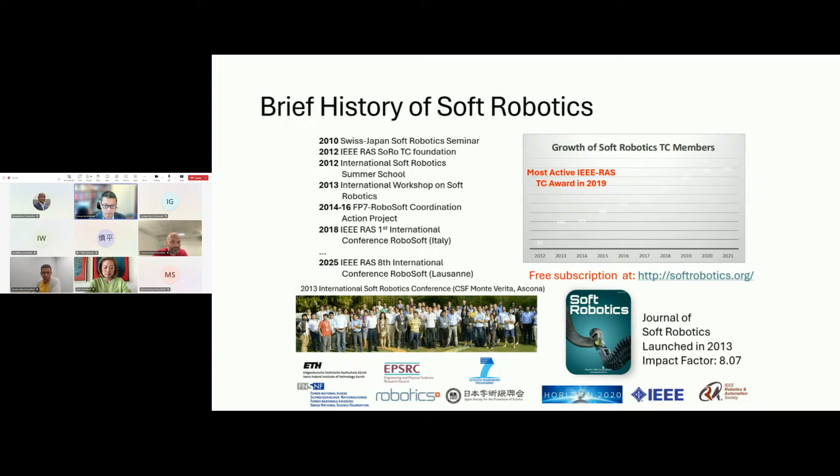If you go to the next slide, you see a lot of events we organized in the past. We started in 2012 with a summer school, 2013 we had a conference, and then many associated events of soft robotics over the years. We even have an online version of this event, the Embodied Intelligence Conference, in the last 5 years.

And the growth of this community is because of the very interesting concept of soft robotics attracting interesting researchers together for the very important discussions about the future of this field of robotics.

If you go to the next slide, you can see from my point of view the soft robotics revolution is happening in the last 10 or 15 years, mainly because of three main driving forces: robotics became cheaper, easier, and faster, and soft robotics only accelerates this direction of robotics research. So even without any skilled knowledge about mechanical design or fabrication techniques, you can actually build robots very easily and quickly. This was the main driving force of robotics.

And I'm telling my Cambridge students that if you're doing soft robotics, you're doing the right thing, because this is a very important research field and many people are joining. But also, if you're not doing soft robotics yet, this is a field you can easily catch up in as a beginner. That's why I'm telling my students that everyone should basically be doing soft robotics.

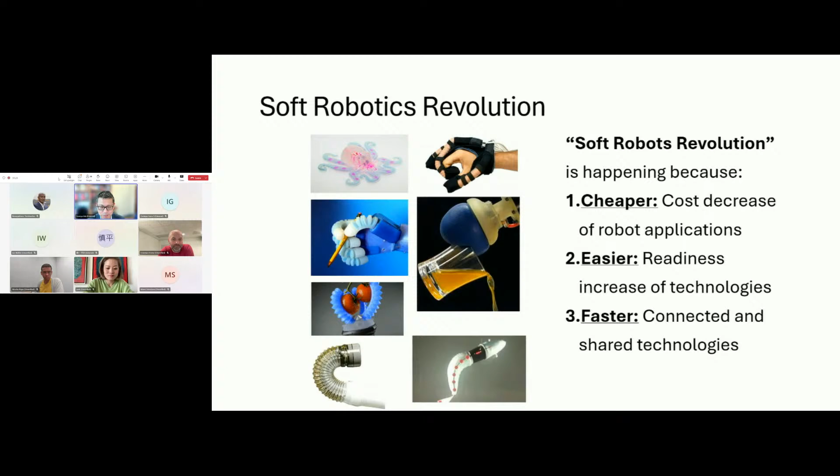Please go to the next slide that shows why soft robotics is an important field. This gives all different directions in robotics, from sensors to locomotion in air, on land, and on water. There are many important robotics applications, such as medical applications, locomotion applications, wearable applications, and industry applications. So this is not only about applications, but also fundamental research, such as simulation, modeling, control, and mechanical design and fabrication techniques. Those are the research fields currently expanding into this field of robotics.

What I wanted to highlight here is that this is just the beginning of this field. I think soft robotics is going farther and farther, and I hope this handbook of soft robotics can show you the depth and breadth of this field and contribute to this community in the future, helping the field grow bigger and more productive.

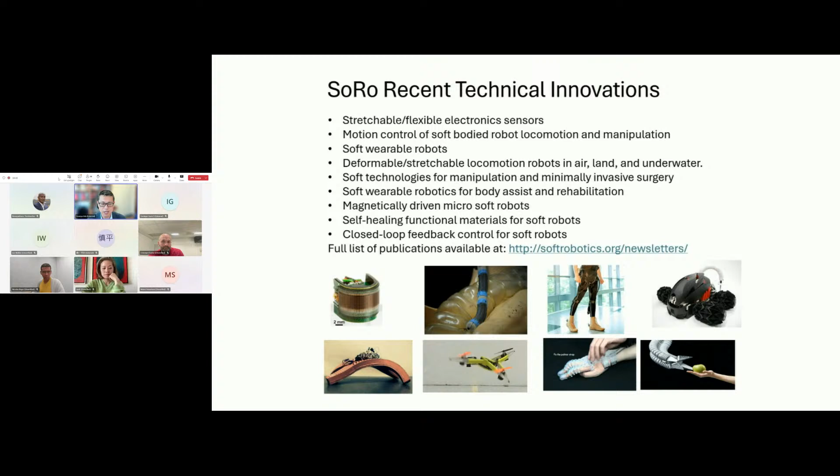Okay, and with this, I'd like to conclude my presentation, and I'd like to congratulate you all again for the big milestone achieved for the soft robotics community. I hope you can enjoy this launching event in London. Thank you very much.

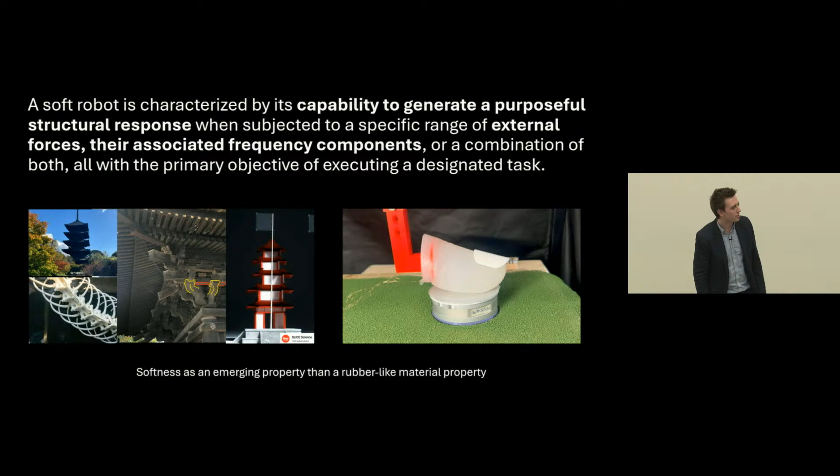Thank you for coming. It's been an exciting journey. It took us about 2 years to do this, so finally we are here.

So in this book, there have been different notions of softness, soft robotics in the field. It was largely limited to rubber-like material, and that is soft, right? But we wanted to be more general, go beyond that, and have a broader definition or explanation for softness. So softness is an emerging property for us, as far as this book is concerned.

For example, on the left you can see this Toji temple. This has survived 400 years of Japanese earthquakes, and it's a rigid structure. But when there's an earthquake, it can behave like a soft snake, exhibiting autonomous, intelligent behavior given some forces and their frequencies. So it is designed to be intelligent given the forces of an earthquake. It is rigid, but it can exhibit softness given the forces.

So our definition of softness in this book is relative to the forces and their frequencies. That also applies to rubber, right? At human-level forces and frequencies, rubber is soft. But it is more general in this sense.

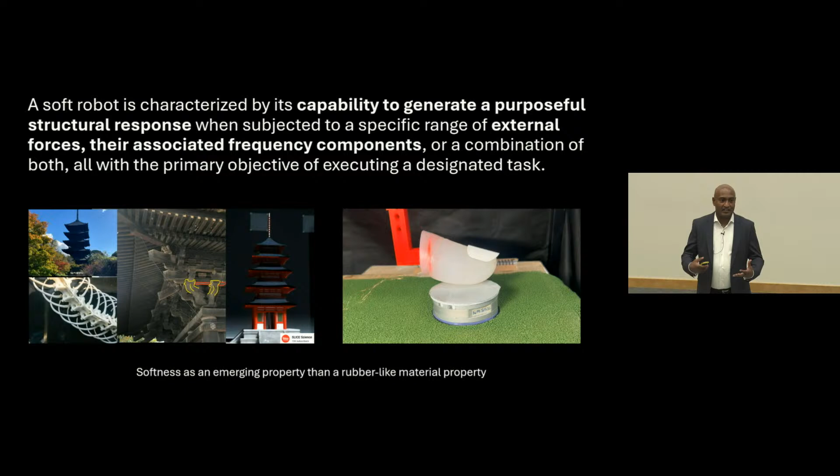And then this robotic finger, developed by a PhD student, Parvati Sunilkumar. For this finger to feel forces, it needs a nail, it needs a bone. So there can be hard structures within so-called soft structures, and they are needed to give this emergence of embodied intelligence. It cannot be homogeneous, it cannot be radically soft. It can be soft and hard, it can be hybrid. So that's how we are relaxing this definition of soft robotics.

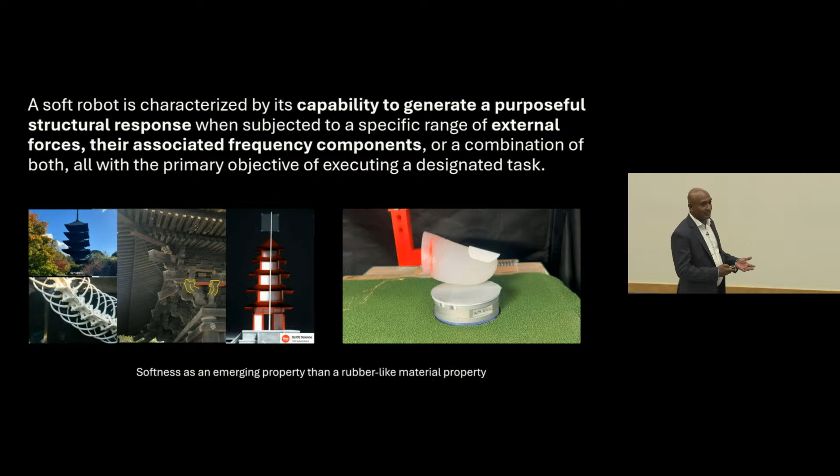So central to the argument about embodied intelligence is this idea of ghost circuits. That's another term we're introducing in this book. A ghost circuit is a circuit that doesn't really exist, but it emerges when conditions are right.

For example, this is a dead fish, and George Lauder's lab at Harvard demonstrated that if there's a turbulent water stream against an obstacle, it can start to swim like a live fish.

What that means is the body shape and its stiffness distribution along the body has evolved to harness energy from the turbulent water, the vortexes, and come into a harmonious circuit. So part of the dynamic circuit required to generate propulsion forces is in the water, actually, and the other part is in the body.

When they come together, they complete a circuit, a dynamic mechanical circuit, and the function of that circuit is intelligent—it emerges as intelligent behavior. We call it a ghost circuit because you cannot pick up the fish and see it.

You cannot see it in the water. They come together and exhibit that behavior. When the fish swims in the stream from point to point, the turbulence level keeps changing, and in the live fish, what it can be doing is regulate its stiffness to stay linked to the circuit that is ever changing.

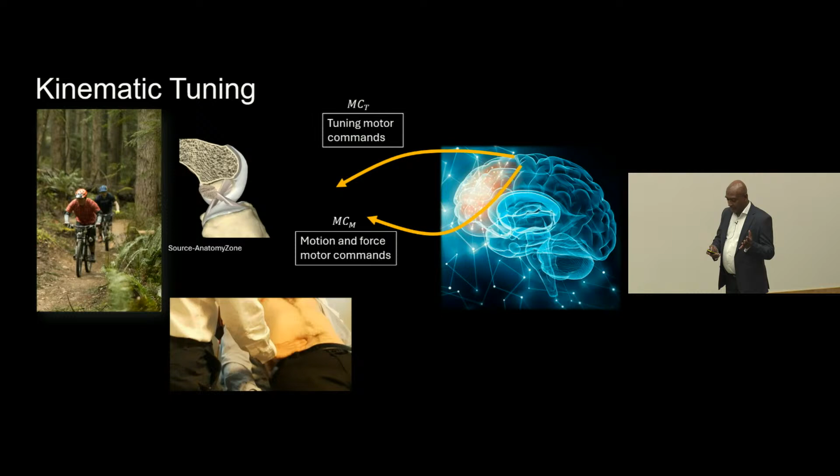Why do they do that? When they want to feel something, right? So the feeling is not also a given thing. You have to be coupled as a ghost circuit. In this ghost circuit, the physician has to be dynamically coupled with the patient in a seamless manner for it to understand what the body random variables are. So it is not a given thing. You cannot just press and feel things. You have to do kinematic tuning to feel things, right? So it is perception and stability both. Kinematic tuning is important, and then that establishes these ghost circuits and maintains these ghost circuits.

The other important thing we introduce in this book is behavioral lensing. Behavioral lensing is about taking MCM type commands in addition to MCT tuning commands, actively moving around in various different ways to feel better. So they would do percussion, bimanual examination, unimanual examination.

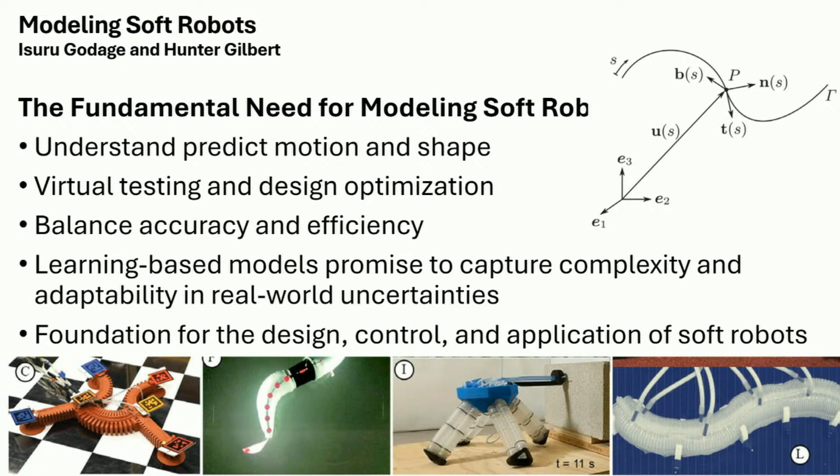And thank you very much, Thrish, for your really insightful comments and discussion. So now we're going to hear from Professor Isuru Godage at Texas A&M. Professor, are you there? Yes, David, can you hear me? Yes, we can. Great, and we can see your slides too. So over to you. All right, thank you.

First of all, thank you to our editor, Dr. Nanayakkara, for leading this effort for two years and assembling a great set of researchers to put together this Handbook of Soft Robotics, and it culminated in a very comprehensive overview of soft robotics that anybody can pick up and use in any part of their research. And it's great to see those in shelves.

And now myself and Dr. Gilbert at LSU, Louisiana State University, was tasked to write the modeling chapter for this book. Now, as many of the researchers, Dr. Ida and Nanayakkara brought it up, soft robots—it's a relative term, but they generate locomotion by deformation. Now, for understanding this deformation, we need models.

The other reason for the necessity of models is that soft robots have a low threshold for deformation, given that it's high compliance, and they are very susceptible to deform passively when they are in contact and applied some forces like touch.

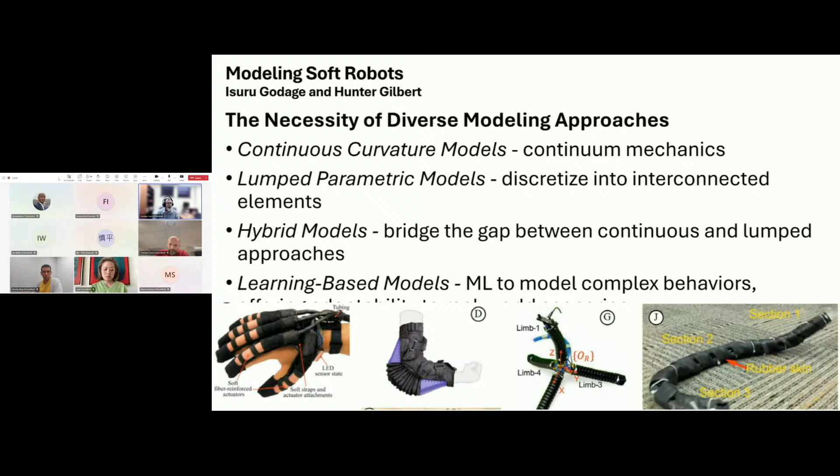Now, next slide please. So we ended the chapter by giving the reader some roadmap on how to select the good model. Now, then again, this is actually kind of an art and a science, depending on how much experience you have.

It used to be that it's trial and error, or you inherited some model from somebody who worked on the problem previously, and then you just live with it. Now what we try to do is try to come up with some set of parameters, and then you kind of identify which one you need from this model.

For example, how accurate should it be? Or if you want to do a design of a robot, then of course you need that to be faster, so you can use machine learning and iterative processes. So the guidelines we came up with are: first you need to understand the robot, like what type of deformation does it have, how complex that is, how do they achieve the deformation, and how fast they are.

And then obviously you need to look at the material properties. Are they stiffer or soft? Because if they are soft, then you need to account for all the environmental deformation aspects and whatnot, and what type of accuracy and precision you need, efficiency.

And if you have a robot already, then there's a chance that you can get a lot of data which could be used to come up with some machine learning models. And of course, finally, the needs for control, because if you try to do real-time control, then we'd like to have a real-time, that means a faster model.

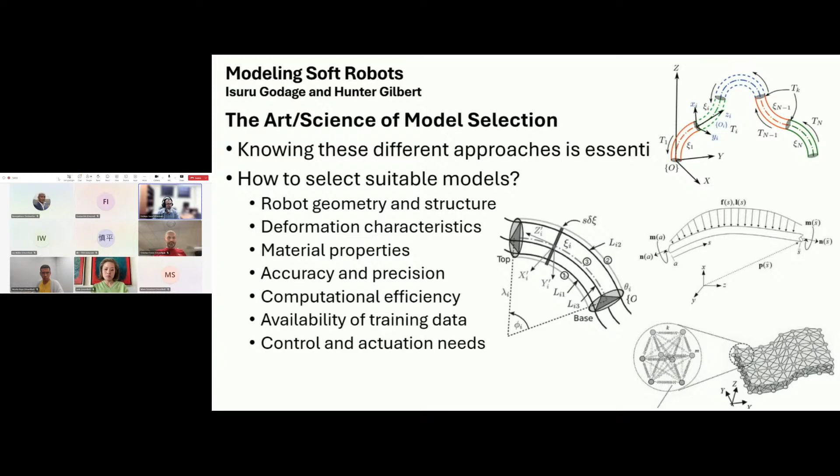Thank you very much, Professor Godage. Really interesting. So now we're going to move to Professor Ian Walker at Clemson University.

Hello, can you hear us? Can you hear me? Great, yes.

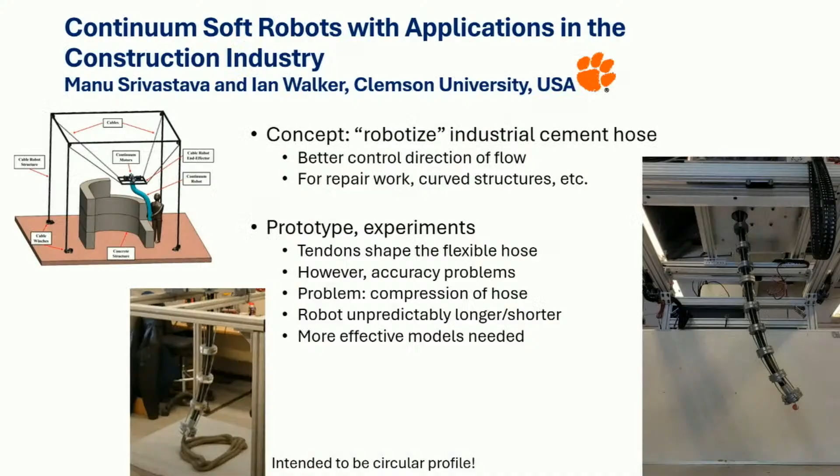Okay, great, thanks. So I'm now with the University of Wyoming, but this work was done at Clemson University. My co-author Manu and I are honored to be part of this group. It's a very distinguished group with lots of really interesting ideas.

Our chapter starts to address the idea of some of the challenges when you want to take soft robots and apply them to particular applications, in terms of the problems you encounter trying to solve particular application-related problems, and then some of the modeling issues that Isuru just spoke about.

Our particular application is in the construction industry, where our goal for the project was to improve the delivery of cement, to be able to give higher fidelity structures, to essentially 3D print cement in a robotic sense.

Our basic idea, shown top left, was to take the industrial cement hose and robotize it. In contrast to a number of things we're going to see today and that are talked about in the book, rather than building a robot from scratch, we inherited the state-of-the-art industrial cement hose, and you can see one moving in the video here. The goal was to make this move essentially like a snake.

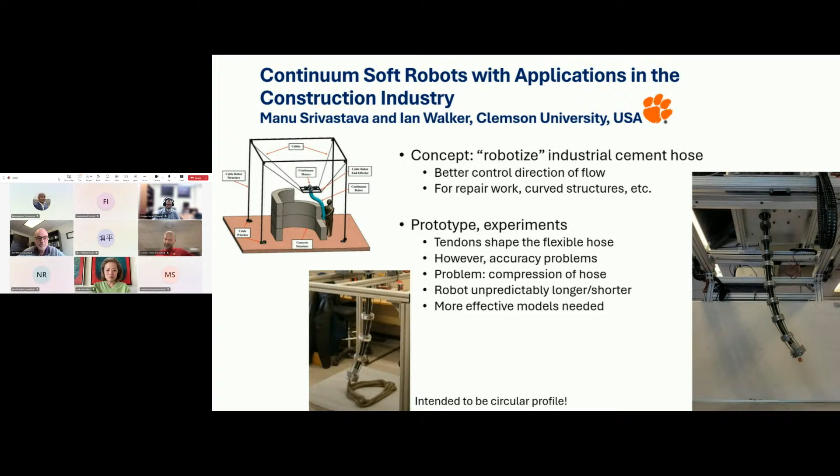The basic problem was that the models we were using were based only on geometry, and they weren't taking into account the tensions and forces being applied to the system. So what we describe in the chapter goes back to modeling: we developed a way of compensating for the axial compression by looking at the statics models and the mechanics of the situation, understanding a bit more about what's going on.

We were then able to come up with some models, in particular models that did not require us to know the tensions in the cables, because that's something that would have been practically more of a problem to adjust.

So basically, we came up with a new elasticity compensation model that let us figure out how much we should pull in the tendons and compensate for the compression that was happening.

Intuitively, the way I like to think about it, probably because I don't ride horses, is that if you imagine riding a horse with reins, you can loosen or tighten them. There's a point at which if you give the horse too much rein, it can do more or less what it wants, and if you pull in a certain amount, you can really restrain the horse. There's a magic spot in there that corresponds to preload in tendon-based devices.

So basically what the model displays, and the details are given in the paper, is how much to pull in on the tendons so that you have just enough preload, just enough tension, so that your robot, as you move it around, does not change its length.

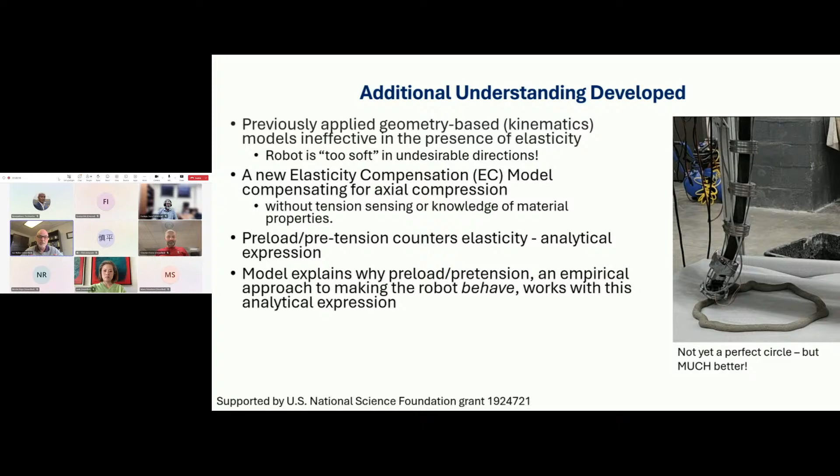I hope that anybody interested, if they read the chapter, will get a sense of some of the issues you have to go through when you're trying to apply a soft robot to a particular practical situation. And there I'll stop, and again, thank everyone for joining.

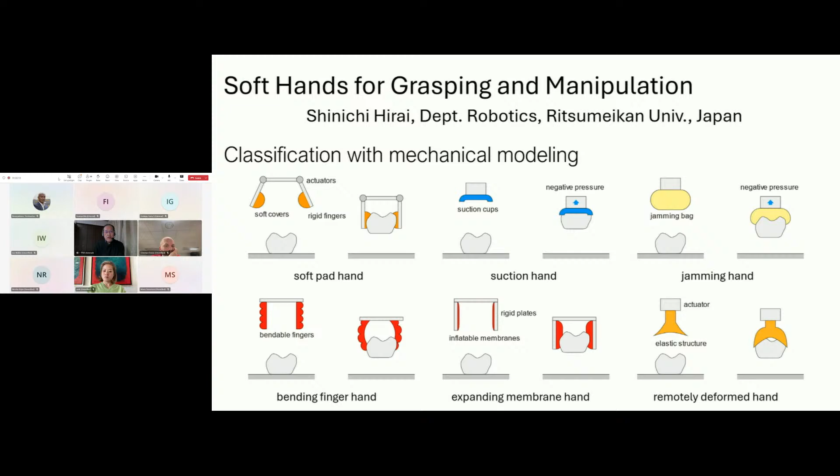Okay, the next slide please. One good application of soft robotic hands would be food manipulation.

I've introduced several soft robotic hands designed for food manipulation, as shown here. I've also introduced soft sensors applied to soft robotic hands, including resistive, capacitive, and magnetic sensors. I then introduced entropy reduction in soft tactile sensing and material design for force sensing.

This means that such soft material can perform information processing, and also if we design the material properties, we can improve such information processing capability.

That's it. I hope you find this chapter interesting. Thank you very much.

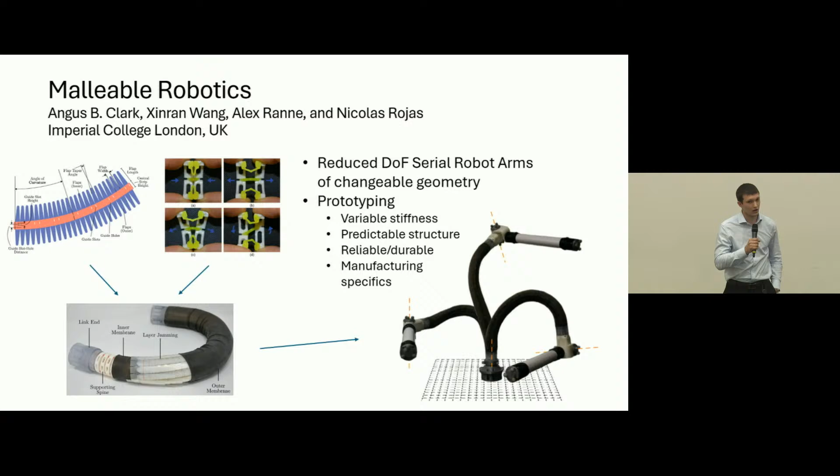We don't just stop there. The next stage is you now have a robot arm, but it changes, and this makes it really difficult to model and actually control this robot arm. The traditional ways of doing this, DH parameters or screw theory, don't really work without integrating lots of complex sensors. So one of the things we also propose in this chapter is a new method.

One thing I want to highlight from this image in the bottom right is a 2 degree of freedom robot arm. It's incredibly simple, and yet some of the workspaces you're seeing here would normally be achieved by a significantly more complex robot, a 3 or 4 degree of freedom robot arm.

Anyone familiar with robotics will know that one of the most expensive components, in fact the most expensive component in a robot, is its joints. By cutting those down, you save in cost.

The final part of this chapter explores how we actually interact with these robots. If you've got a structure that is changeable, you need to be able to predict what those changes are actually doing. One thing we explore is the use of holograms and human-robot interaction, which allows us to see in real time the changes you're making and how those affect the capability of the robot. I hope this chapter will be a very valuable resource for anyone reading it.

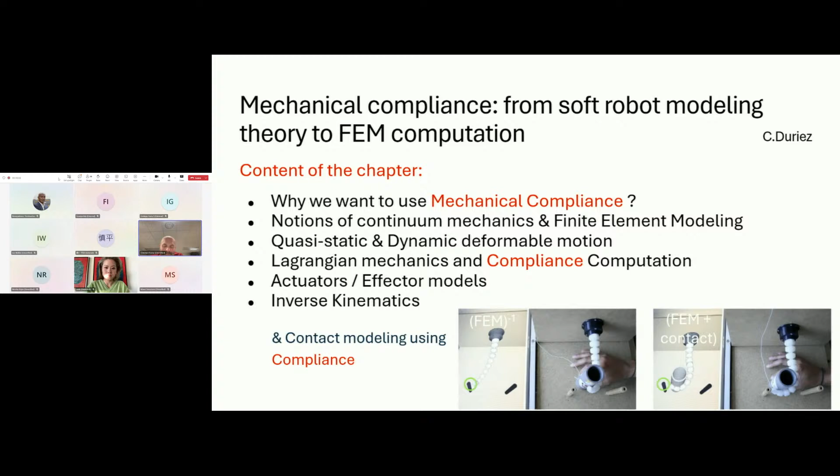I included this image because I think it's essential to model the contact when you are modeling a soft robot, because the whole purpose of a soft robot is to go into and interact with their environment. I don't have time for all the detail about the modeling aspect, but I think we can go to the slide.

Just a motivation, and I start with that chapter. So why I do the emphasis on compliance, and to give you an idea of what the chapter is about. I start by explaining the concept using an analogy with the problem of equivalent springs that all of you know.

So the springs in parallel and the springs in series. These soft robots, theoretically, have an infinite number of degrees of freedom. In practice, we won't be able to manage all these degrees of freedom, so we want to use a reduced number in our modeling methods. When we compute equivalent springs, for springs in parallel, what we do in practice is say that they have a limited number of degrees of freedom—they can only move all together. So we do a DOF reduction, and that's the stiffness approach.

So when you go from a reduced number of degrees of freedom, you are in fact adding springs. This is something we will use in our methodology, for instance, to reduce the number of degrees of freedom and to accelerate the computation of the methods.

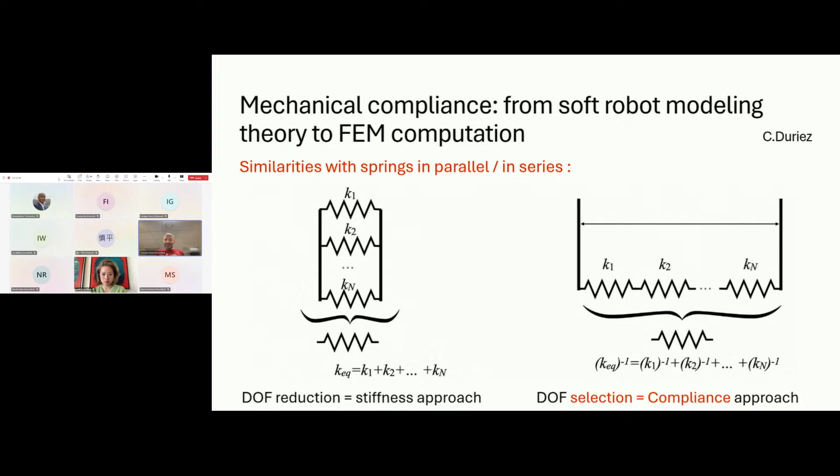It's particularly useful when you don't want to reduce too much the size of your model, in particular when you have contact—you don't want to reduce too much your degrees of freedom. So that's why I push this notion of compliance, mechanical compliance. Then you can go to the next slide, starting with trying to convince you that we need to compute this robot compliance in the chapter.

I explained that to obtain it concretely, we have to go through continuum mechanics and develop numerical methods like FEM to get this compliance. But in fact, we want to have this compliance in certain spaces, so we'll use the Lagrangian formulation to develop, for instance, actuator models, and be able to compute the compliance in actuator space, in contact space. There's also contact with the environment to compute the compliance in effector space, and how we can couple—this compliance couples the effector and actuator space. Out of that, I show that we can derive a very generic model for direct and inverse kinematics, and there's also some extension for sensor models.

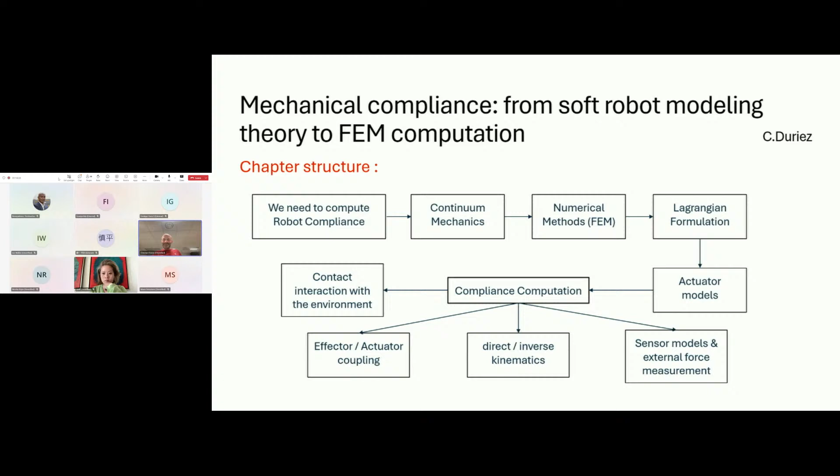So that's all the spirit of this chapter, and that's it for me. I hope you will enjoy the chapter by reading it.

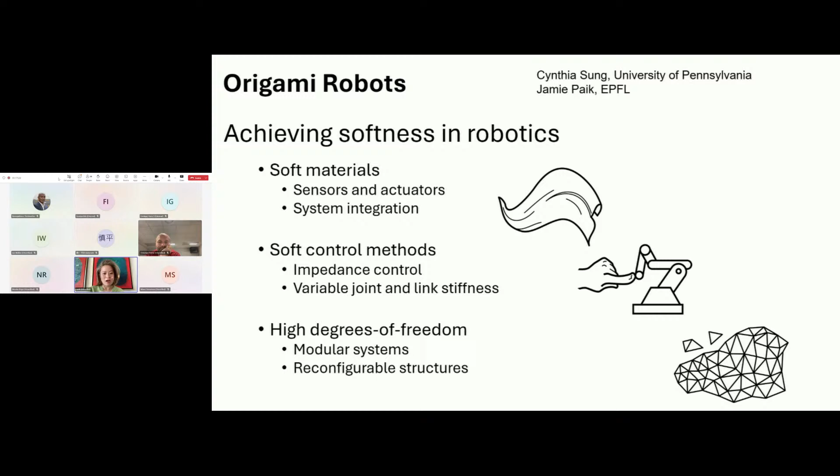So in this chapter we talk about how multiple different formats of fold create their own transmission. Depending on where you put the input and what the output side, the end effector, is, you're able to get a predefined trajectory as well as a transmission ratio—effectively changing the force vector from input to output.

Professor Sung and I go through how these transmissions can be modeled and applied to origami robot systems, either completely independently as a full robotic system, or combined with soft materials and intrinsic softness, so that we're able to create, at the end, a soft and fluid motion.

In the chapter we talk about different aspects of origami robotics—the modeling, where Professor Sung highlights a lot of design, control, and manufacturing. And it gets really exciting for the rest of the soft robotics community, from what I've observed.

The reason is, by definition, origami robots are quasi-2D. Things are inherently embeddable, so how you design your sensors and actuators—they can be manufactured in a quasi-2D manner. What's great about that is you're able to embed these essential robotic components, meaning sensors, actuators, microcontrollers, transmission, within your soft structure or existing platforms as an addition.

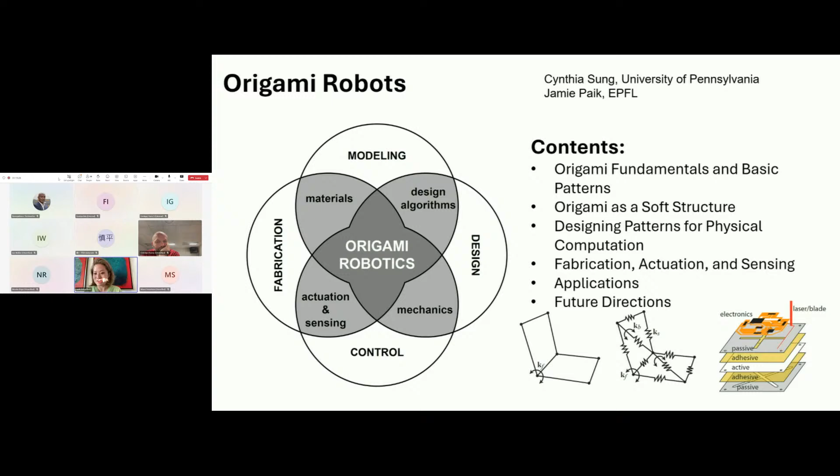So we go into a bit of how these are manufactured and could potentially be integrated for different applications, and we touch on the materials and design algorithms we can employ to bring this to your future research. That would sort of summarize our chapter. Thanks for your attention.

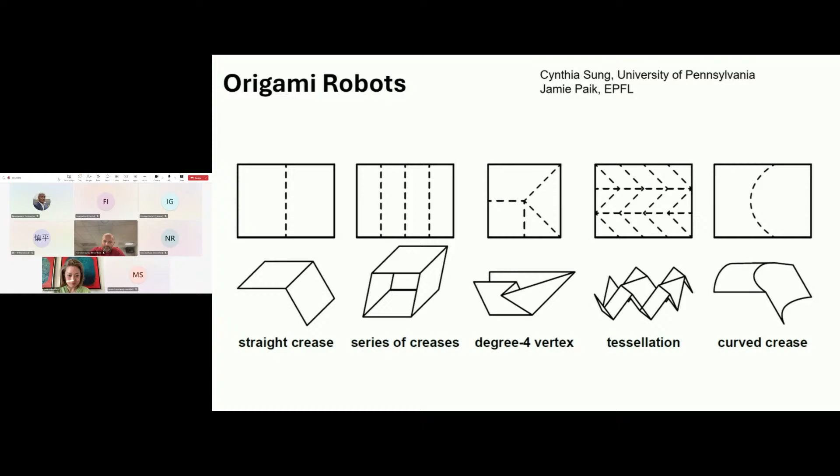I really like the tutorials you provide in your chapter on malleable robots. My question is, how can malleable robots close the technological gap that separates current cobots or collaborative robots from achieving accessible and flexible manufacturing automation?

That's a great question. One of the big differences with cobots is their human-robot interaction. You've got robots that are in a very different environment to what we would expect industrial robots to be, where they would normally be locked behind cages, performing very rapid tasks. Cobots, the difference is you have them working alongside humans, working together to try and complete tasks that are potentially more complex.

More changing. So with a normal robot, you program it, you let it do its task. They're brilliant at doing that many times over. With a cobot, the idea is that you can move away from that area of thinking and use the benefits that a robot can provide, which is repeatability, its precision, its accuracy, whereas with a human, they have that kind of malleability, where they can adapt to problems.